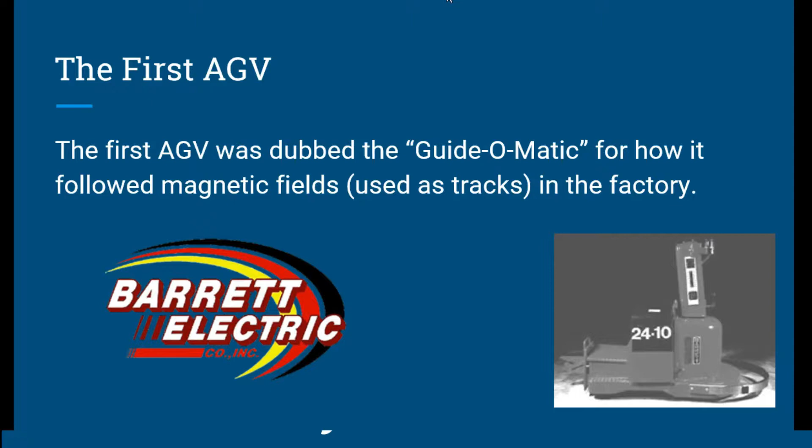Barrett had placed copper wire through the floor of the facility, and this copper wire was emitting magnetic fields that the Guide-O-Matic would follow to go place to place, used as a track.

So some types of AGV are known as the laser-guided AGVs. These specifically used mounted laser sensors to place a pointed laser on an object. That laser would then reflect off the object into the sensor, and then the computer interface would measure the distance based on that reflection and orient itself to the object.

The next type of AGV is known as fixed path systems. These systems used materials like wire or tape to create a path for the AGV to follow. This technique, however, does not allow for easy manipulation of the route that the AGVs would use. Up in the top right, you can see a specific example of a fixed path system, with the AGV here in green and the apparent path that it would be following.

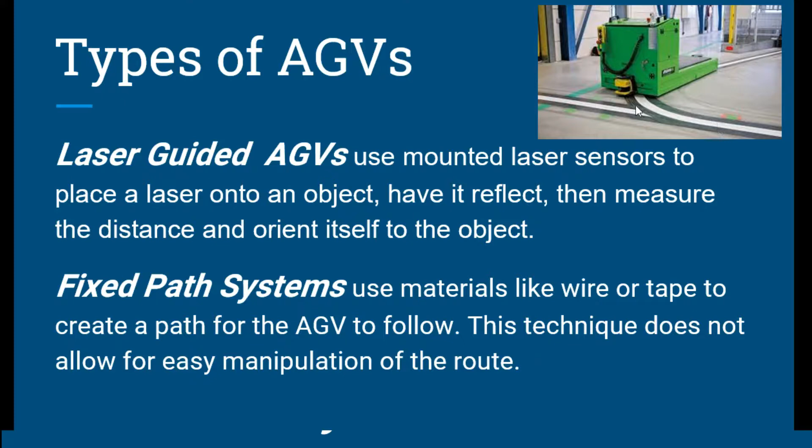The next type of AGV is called a camera-guided AGV. This used onboard cameras to see their surroundings while performing tasks. These AGVs are most helpful when you require precision navigation through a crowded area or an area short on space. So these specific AGVs were used to make tight turns throughout the facility, and it was overall a more precise way of going throughout the facility.

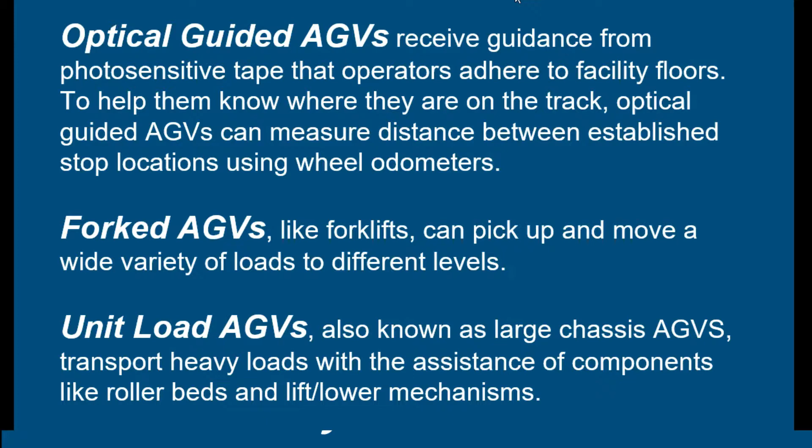The next type of AGV is the inertial guided AGV. This specific type relied on magnets mounted underneath the floor to get their sense of direction. They determined their location and where they need to move using, number one, a device to sense the magnets, number two, a gyroscope to measure the unit's heading, and number three, a wheel odometer to calculate how far the vehicle has moved.

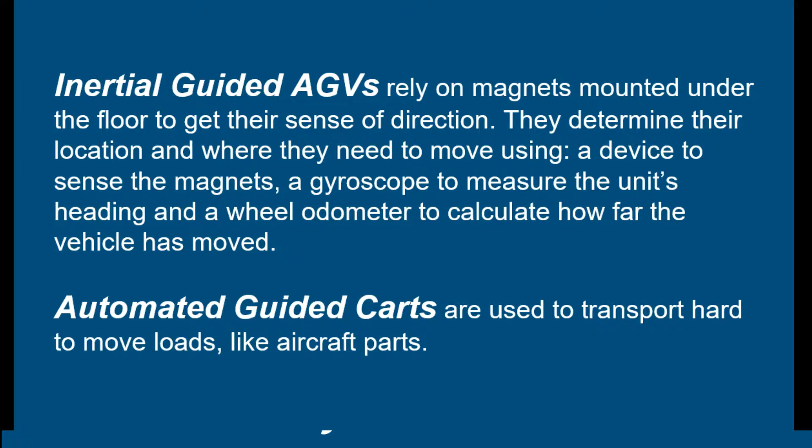Another type is the automated guided carts. This specific AGV was used to transport hard-to-move loads, like, for example, aircraft parts.

Another type of AGV is the towing vehicles. They are very, very simple AGVs that can transport heavy pallet loads, but they cannot assist in putting together small parts. So they are essentially like the forked AGVs and the unit load AGVs.

The next type is called the outrigger AGVs. They are built with two horizontal legs known as outriggers. These specific outriggers provide stabilization and lateral support so that the AGVs can move racks, pallets, and just rolls.

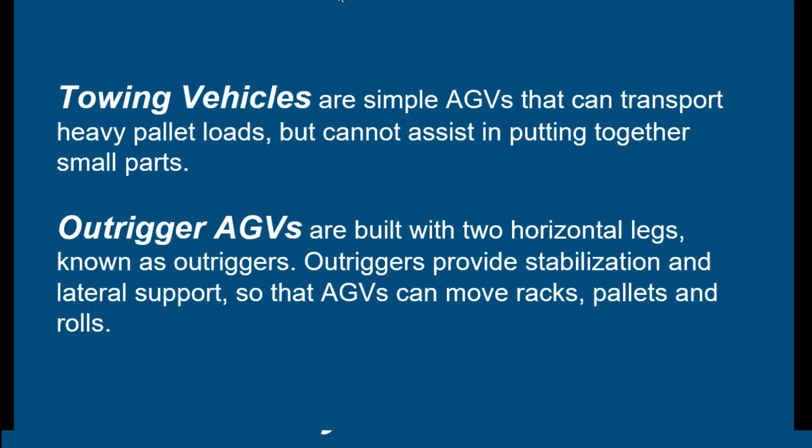If we look at the bottom right, we can see an example of an AGV by the brand of Optimatics. Here we can see that the AGV will have a safety scanner to be able to scan in front of it and make sure it's not going to do any potential damage. You also see that it has an emergency stop feature as a button so that the human operators can stop the AGV in its tracks before it does cause damage if the scanner does fail.

You can see that it also has a safety color, which is obviously the bright yellow, which is easily visible. It also has reflecting foil so that lights or anything that can detect light can bounce right off this foil and then divert its path in accordance with this AGV. It also has a safety bumper or scanner. Basically, when it runs into something, it'll say, hey, there's a thing in front of me, to the side of me, wherever it is I have hit something, I need to adjust my path and divert it.

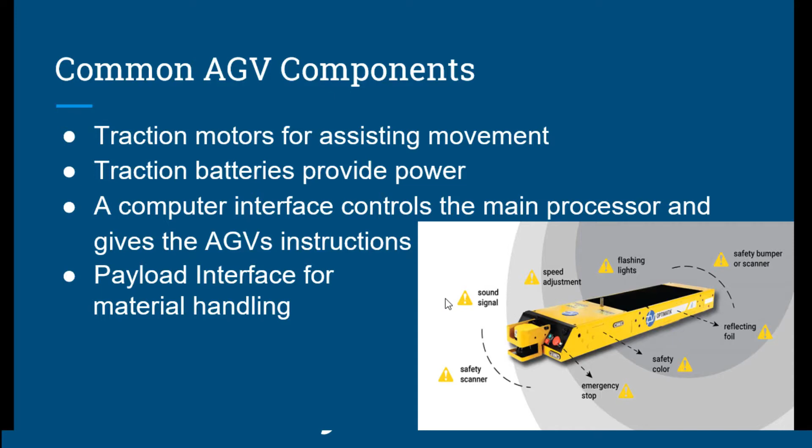Some benefits of using automated guided vehicles are reducing human error in operation. They increase efficiency. They don't require much maintenance. The only maintenance really required for an AGV is setting up the pathing and then changing the pathing based on the needs and necessities of the facility and or the company that is in charge of the AGV. And then ultimately it saves money for the company based on labor costs.

While the initial price of the AGV systems is pretty hefty, in the long run, you're not going to have to pay robots a salary, whereas if you had human operators, you would. So in the long run, having AGVs will save you money over having to pay humans.

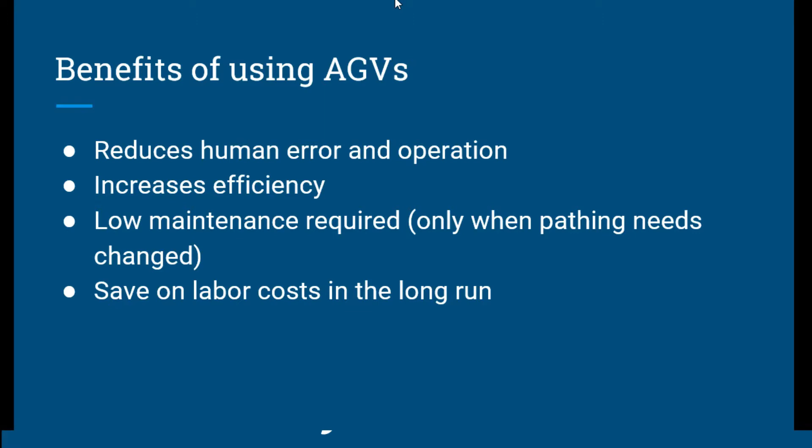So we are now to modern AGVs. This is a look at modern and upcoming future AGV technology. So industries are currently in the midst of a transformation through the use of AGVs, and they are calling this transformation Industry 4.0. However, this comes with some disadvantages like big data. Big data is essentially the idea of too much data being inputted, to where the computer interface cannot handle that amount of data. Though companies are combating this through efficiency and the additional profits through less labor costs, as mentioned on the prior slide.

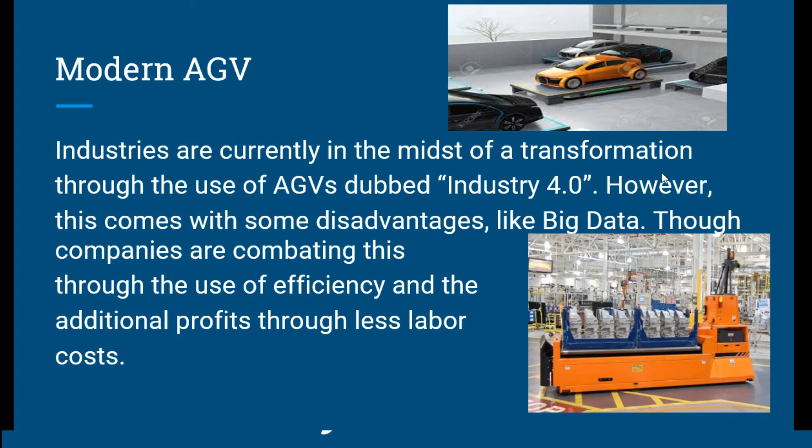So if you look at the top right AGV, that is the AGV of the future, the platform on which the car is sitting. It moves cars around as essentially a unit load. Whereas the bottom right is a more modern AGV you would find in a warehouse or a facility.

So in conclusion, AGVs are becoming integrated in more and more companies, whether they be retail stores in the back of said stores or factories, facilities, warehouses, you name it. AGVs help the manufacturing process and move materials or products from station to station.